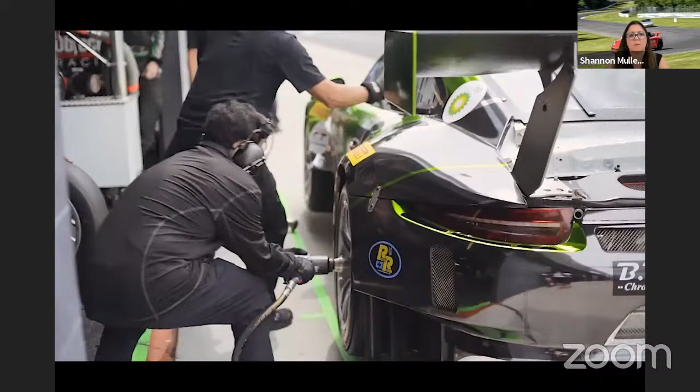In comes the leading car, the 12, to get service. And one pit box up, Black Swan has brought in Luca Stolz, and they're handing the reins over to Jeroen Bleekemolen. So I think it's a pretty good time to be a Porsche driver.

And it's all coming down to fuel. Matt Campbell has 2 extra laps of fuel than the 2 Porsches ahead of him - that might just be enough to allow him to drive a bit quicker. Safety car comes out now. All bets are off. We're chewing our fingernails, and we're 2 laps better off than the 4 cars in front of us, so I'd hate to think how nervous they are on fuel at the moment.

It's going to come down to the wire, it looks like. 10 or 11 laps to go around here. The countdown is on at the mountain. Campbell can win this race.

There's a safety car. That Mercedes comes in and gives it a heck of a lick. Wow. Race suspended - this is history being made here in the 12 hours. So they will pull the cars onto the grid. The issue here for the guys at the front is they haven't pitted to fill the cars up with fuel, and now they can't.

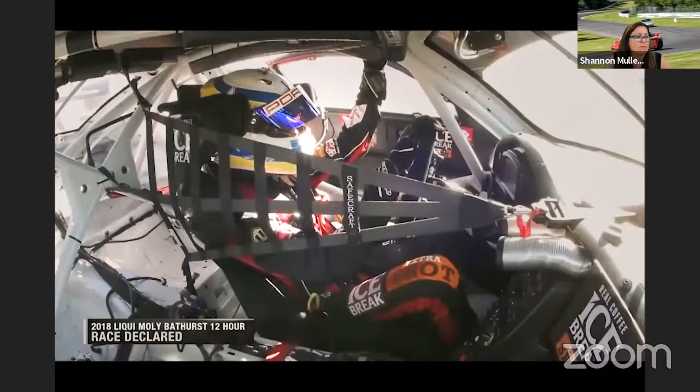Now the question on everybody's lips is how much fuel is still in those cars. Race control to all teams: the race has been declared. They've not seen the checkered flag. There'll be no more racing. And this is a unique set of circumstances here at the Liqui Moly Bathurst 12 hours.

You know, to come down here and run 12 hours of Bathurst without any issues at all is just a testament to Porsche Motorsport.

I think David and Tim's relationship is a small example of what I talked about - the connection to people all around the world. Porsche is almost a religion where church is at the racetrack, and you see all these people from different walks of life. But once you come inside the walls of a racetrack, you all speak the same language. You travel around the world together. There's this real connection where racing brings people together.

To finish second in class and 4th overall, I couldn't have done it without Competition Motorsport and the support of Porsche. Let's get him back out in BRM Watches Pro-Am for Black Swan Racing - Tim Pappas, Jeroen Bleekemolen, Luca Stolz and Marc Lieb.

You run a Porsche and you can win.

Well, that was pretty awesome. We'll ask you about the logistics of packing up and flying halfway around the world to go for a race in a little bit. But that was neat.

I'm going to jump to Bathurst 2019, and then we're going to show some pictures of that. But you were nice enough to show me and my friends around your operation - I got to meet some professional drivers in the bus. Mike, I think you were there as well. Yeah, that was an awesome time. And everything was running good. You guys were flying out there. And then it started to rain and rain and rain.

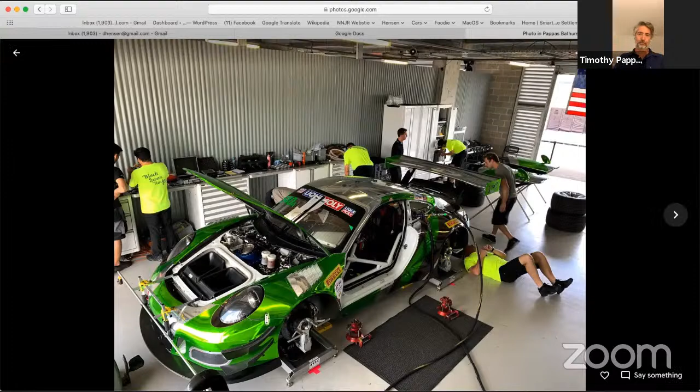And Conrod goes from 180 miles an hour, 6th gear, the fastest place we ever go, to a second gear left-hand corner. Straight ahead is basically a concrete retaining wall, because the earth goes up towards the hotel.

So that's me when I got off, basically pitched the car sideways to throw as much weight as I could, and also to hit backwards, which fortunately I did.

That's the aftermath. Those are the guys there, the spectators who put the fire out.

Oh, that's a small one. There's a big one. That's the car backed in and quite a bit shorter. And it was up.

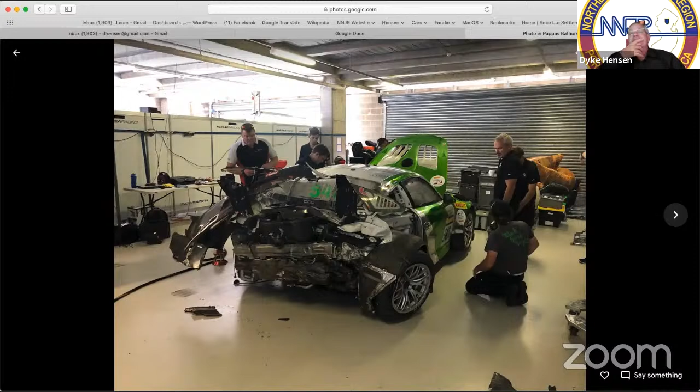That's the inside of my helmet. Can't really see from the picture, but the styrofoam inside basically got a huge depression and crack from where the back of my skull impacted it so hard. It was enough force that my head crushed the styrofoam inside and actually broke the carbon shell of the exterior of the helmet.

That's an 8860-2010, all carbon, $4,500 helmet that's basically like an F1 quality helmet. So it was an estimated impact of somewhere between 65 and 85 G's.

You can see the strap on my Simpson hybrid. I wear the hybrid instead of the HANS for a number of reasons, but you can see where the tether comes around the yoke and has actually cracked the carbon. Wow.

And that's my right arm, which has a fully separated and telescoped fracture, because as I pitched the car to spin it backwards, I was able to tuck my left arm in before impact, but my right arm was still out. The force was so strong my arm kind of flopped out sideways and just snapped around the seat.

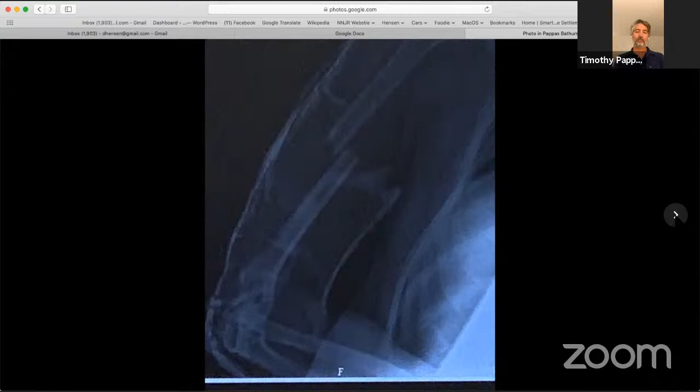And that's what they did afterwards to fix it. So now I have bionic parts.

At the same time, when the car smashed backwards, the car got a lot shorter, and my legs on both sides smashed through my pelvis. The left side was much worse than the right side because of the dead pedal. My leg was much closer.

And that one required pins and screws and stuff. The right side was fractured, but didn't require surgical enhancement. But it did put me in a wheelchair for 3 months.

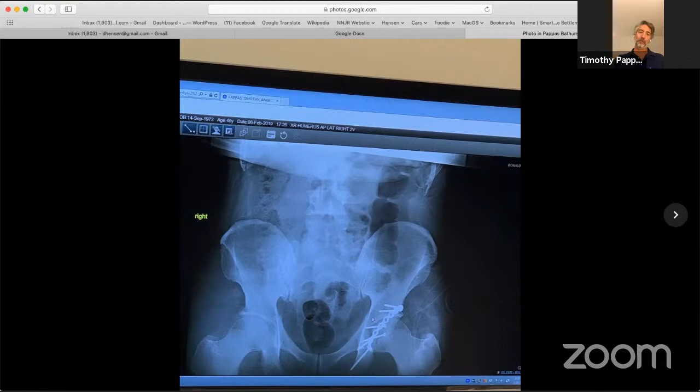And I had to wear that around the hospital. That was my badge of honor.

One thing I got to point out is you got this surgery done in the United States, not in Australia, right? Yeah, it's an interesting point.

Porsche and Audi bring doctors to all these flyaway races. That's another thing that's pretty cool about being a customer of Porsche or Audi. The Porsche doctor was German, and the Audi doctor was actually an ER doctor from Denver, named Alex. The head of Audi Motorsport, who's a friend, Chris Reinke, texted me saying, hey, we've got this American ER doctor, do you need him in the hospital?

And I said, yeah, it'd be helpful. I don't really know what's going on, and it's hard to make decisions. So he came to the hospital in Sydney from Bathurst, spoke to the hospital, then came to me and my wife and said, there's no way you're having surgery here.

He was communicating with Terry Trammell, the famous racing orthopedic surgeon in Indianapolis, and Trammell just didn't have a guy in Australia that he trusted. So the decision was made that I would fly back to Los Angeles and have surgery there.

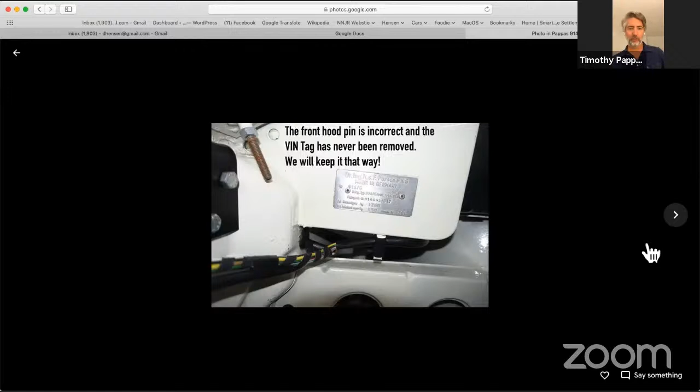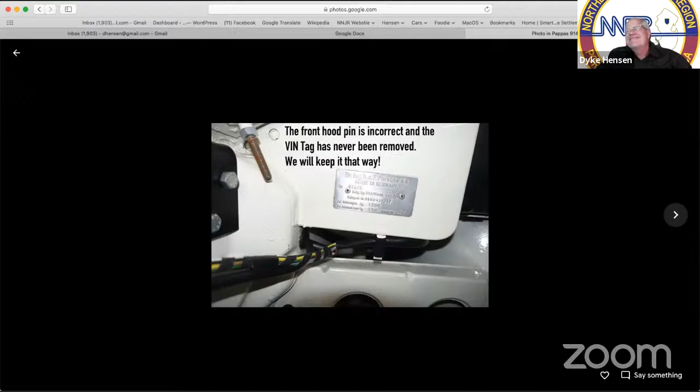There's a lot of writing on these that's hard for me to see on my phone. Okay, this says the front hood pin is incorrect. The VIN tag has never been removed, we'll keep it that way. I don't know that we need to read every one—you can leave it up and people can read it if they like.

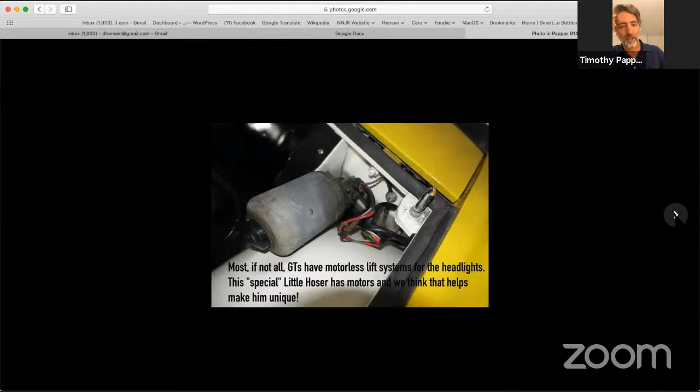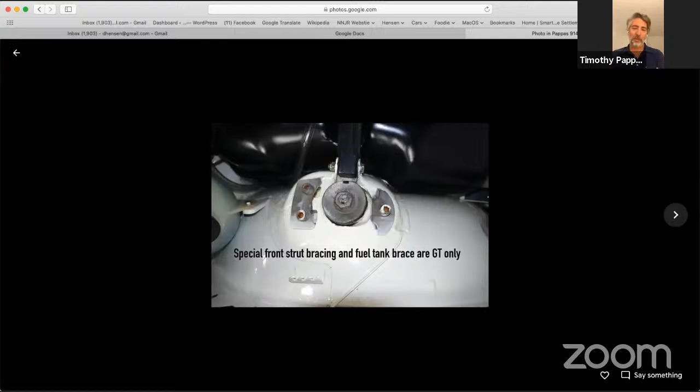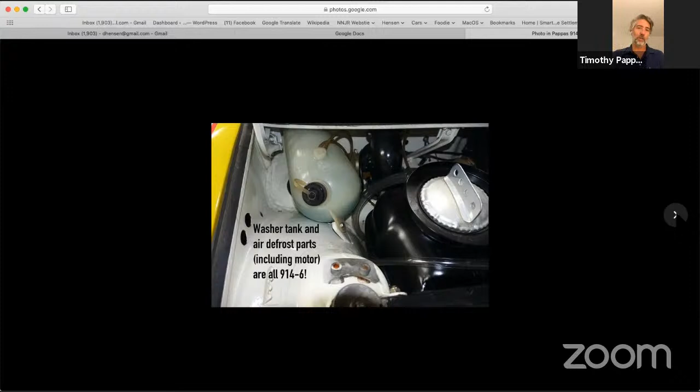I think the more important and fun thing is Kevin takes the car apart and makes all these notes, then posts everything on Instagram. He's posted this entire story from start to finish about the process of restoring what we're calling 1017, which is the last 4 digits of the VIN. This included taking the paint off selectively in different areas, very carefully, to find out what colors were underneath. Doing this, we ultimately uncovered that the car had been painted signal orange, and only the factory GT cars, the ones they intended to campaign themselves, were painted signal orange. The customer cars were all painted white.

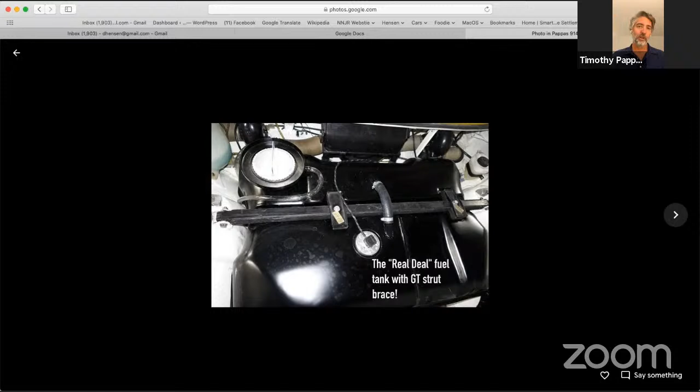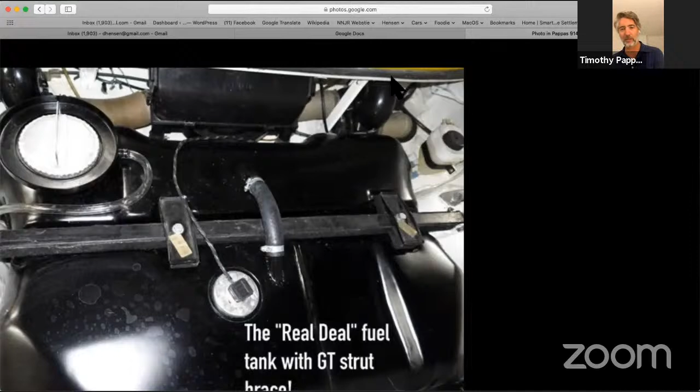Well, this one, underneath the white paint, had signal orange paint. So as we restored it from bare metal, we primed it, and then after priming it, we painted it first signal orange, then white, and then the livery it won Daytona in, so that it's completely accurate in every way.

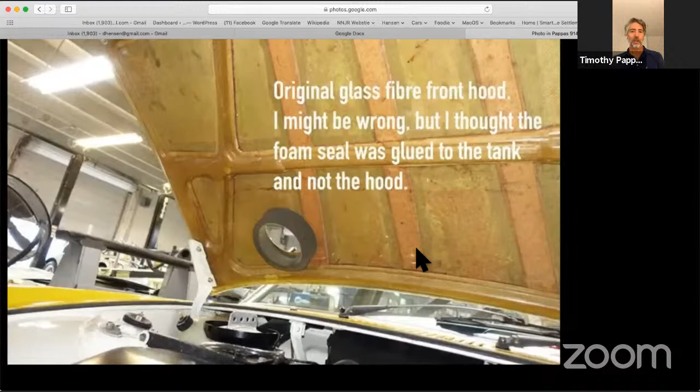But we did do some other fun stuff. The factory hoods and all that are still there. Kevin took... we took the fuel tank out, the factory GT fuel tank, and he splashed a mold off of it.

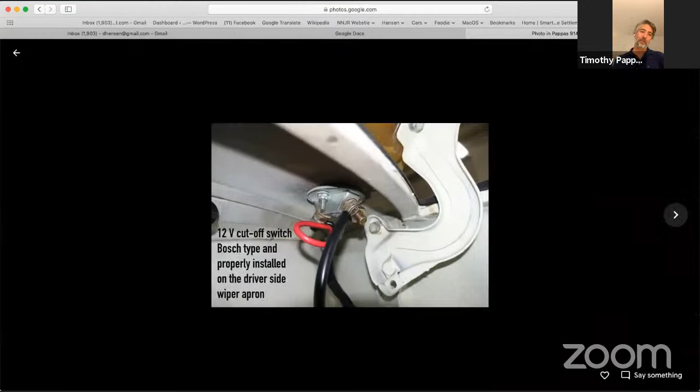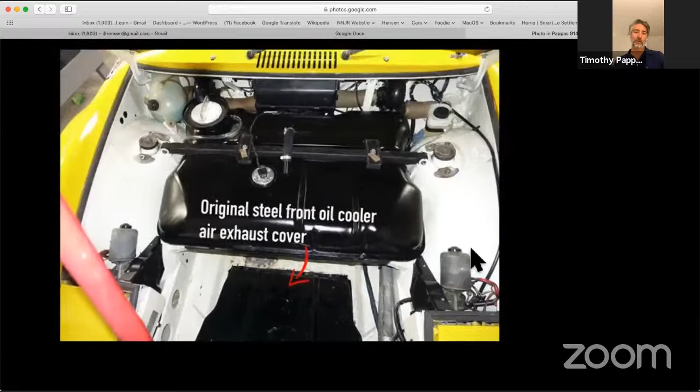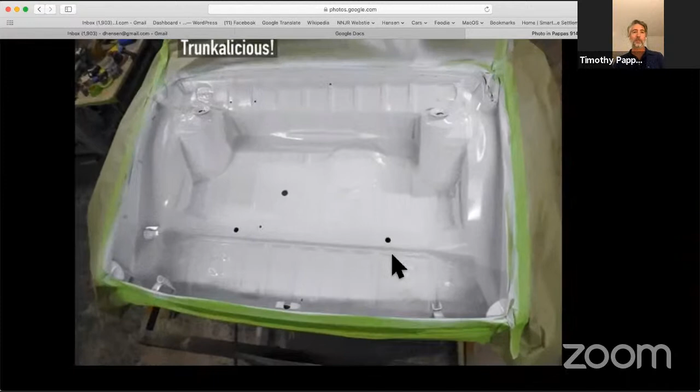We're making basically a fuel cell just the way the factory would have done in the later cars, because they didn't have a fuel cell—this car just had a steel, non-fuel-cell tank. So we've now converted it into a proper ATL fuel cell, using the tank and painting it in such a way that when you open up the hood, it'll look like a metal GT fuel cell, but it's actually a proper safe one.

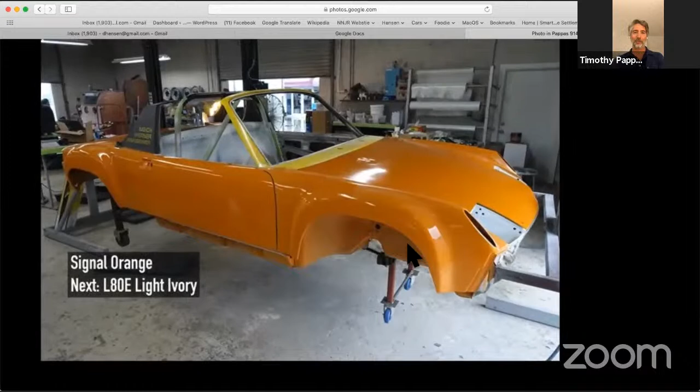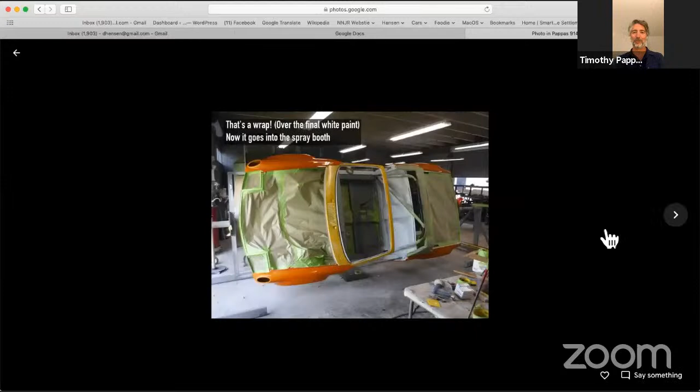So there it is in signal orange. And of course everyone says, I can't believe you're putting 20 pounds of paint on the car just to have it authentic. But I could not convince Kevin not to do that. He just refused to cut corners. For him, authenticity is everything, and he really marches to the beat of his own drum.

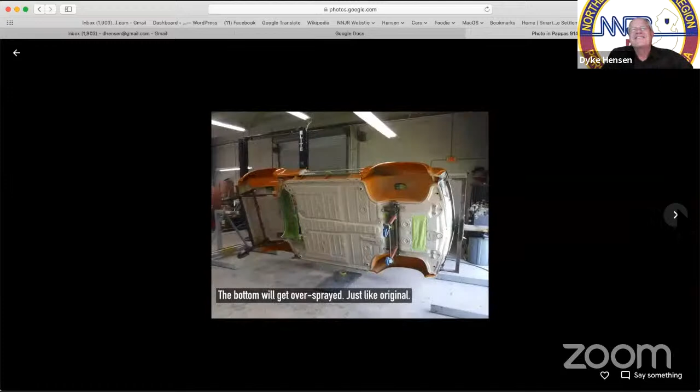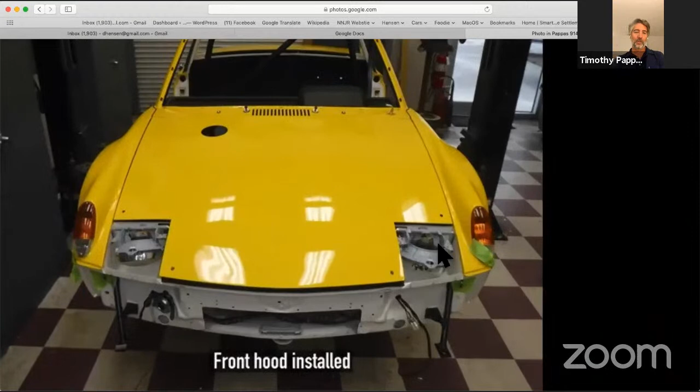Yeah, it's beautiful. You uncover and learn a lot about what went into these cars, and we had a lot of debates about what to do on the safety side. It will ultimately have a current modern Recaro racing seat with a halo around the driver's head, mounted at 6 points in the car. You can see a picture of it.

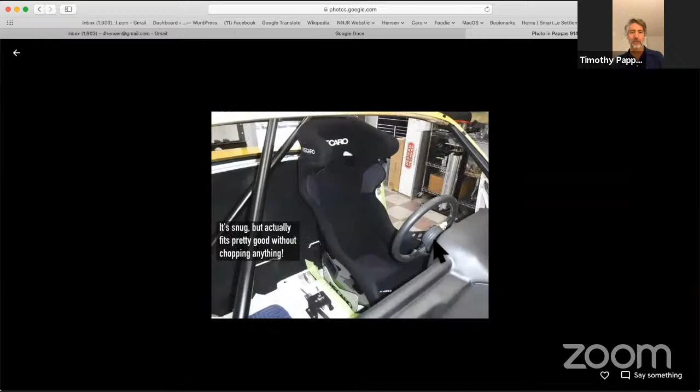One of the guys was quite tall, and so in the driver's seat, you're sitting on the cushion and then there's just nylon webbing. They actually cut the bottom of the shell of the seat out in order to sit the guy down as low as possible, which is just, you know, scary. But back then, that's what they did to make themselves comfortable.

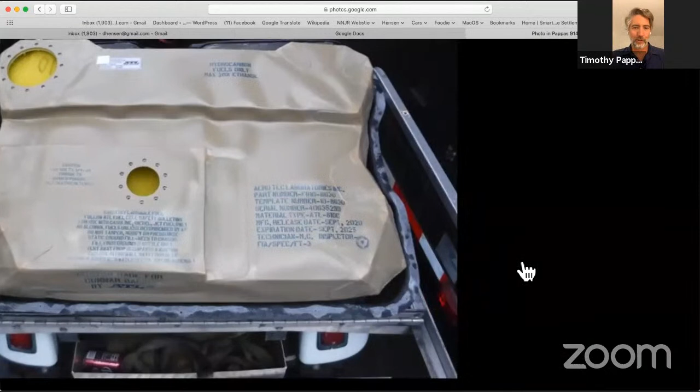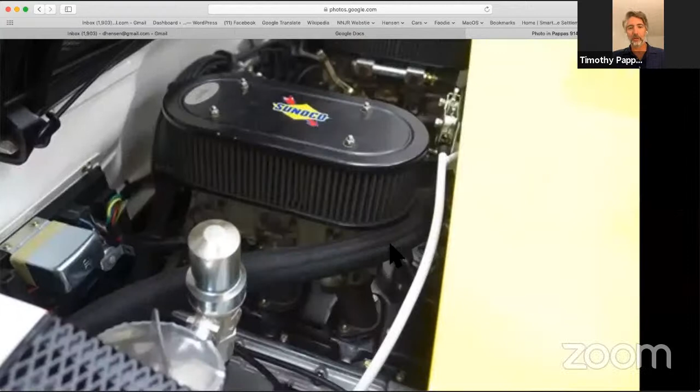So there's the new ATL fuel cell going into a knockoff outer shell. And there it is, just about completed before we put the engine into it, but with graphics going on. Actually, on Friday of this week, it's going to run for the first time.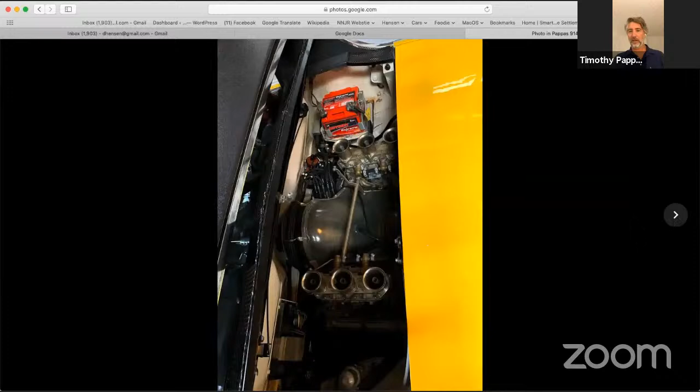We built the engine out in California, and it was fully HSR legal and FIA legal. So it should be interesting to see how badly we get beaten by everyone else who's cheating like crazy in the series, because again, Kevin didn't want to build a cheater motor for it.

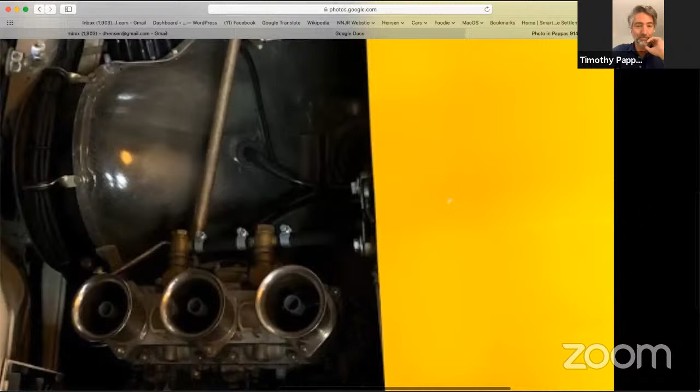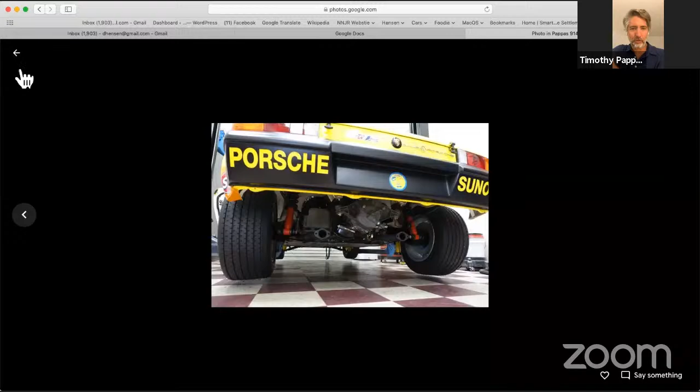Yeah, it's beautiful. It is absolutely beautiful. Very rewarding to learn about how these cars were built.

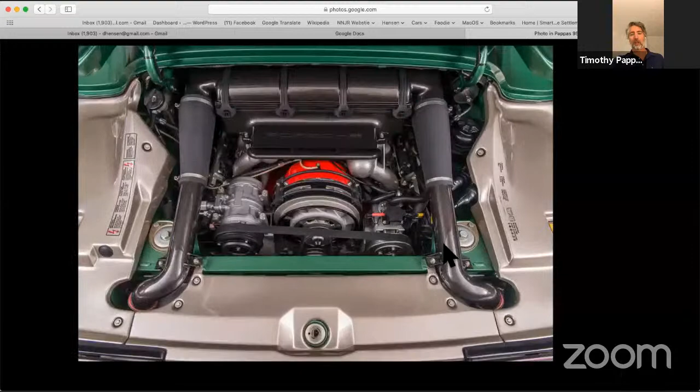He took me for a ride in the car, and it was only about 6 minutes into the ride where I said, okay, sign me up.

He goes through and completely changes everything in the car. The engine in the 959 is by far the most incredible engine Porsche has ever put in a street car of this era, because it's a 4-cam, 4-valve, twin plug, twin turbo. But it had a lot of funky stuff, like sequential turbocharging. So what Bruce did was take all the best attributes and convert it into standard parallel twin turbocharging, convert it to Motec engine management, and do a whole bunch of other stuff. But because you're starting with a water-cooled cylinder head with 4 valves and twin cams, you can make gobs of power. So that car, 2.85 liters, makes 820 horsepower and 650 pound-feet of torque.

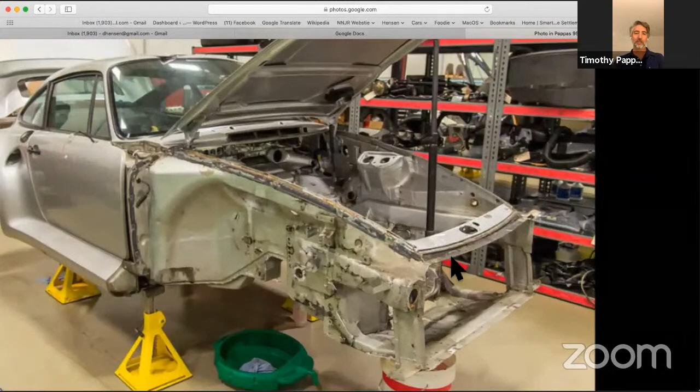When he told me that statistic, I basically called BS and said there's no way. So he took me for a ride. And Bruce, if anyone would ever ride with him, just don't, because he's a maniac to drive with. He did his best to scare the hell out of me, driving his own car. After about 10 minutes of driving, we pulled up to the first traffic light after this hot lap, and the brakes were smoking so badly out the side of the car. I couldn't even believe it, because he had pushed it so hard.

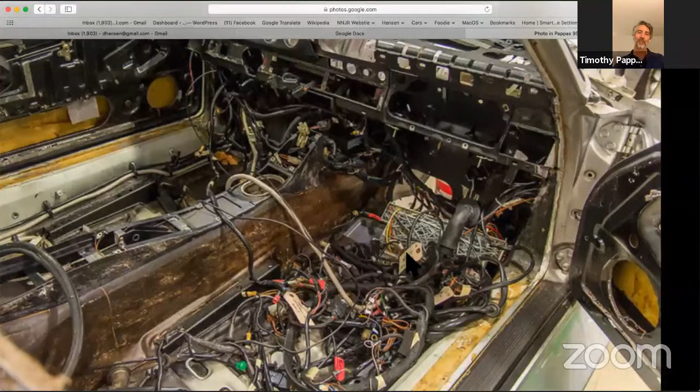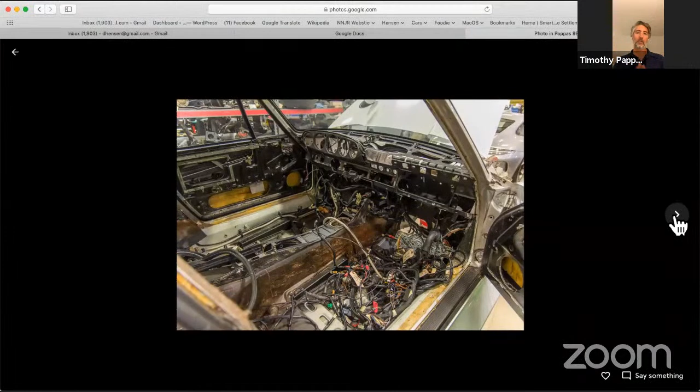You can see the amount of electronics in one of these 959s is unbelievable. It had self-leveling ride height using hydraulic lifters. What we've done is basically converted the car to the equivalent of 959S suspension, so no hydraulic lifters, but still twin shocks at all four corners, and the shocks have titanium springs to save weight.

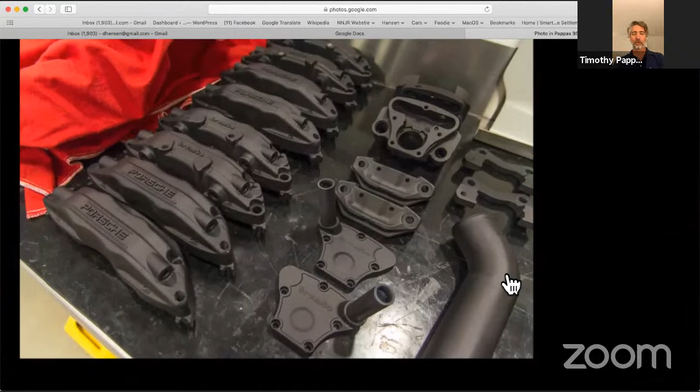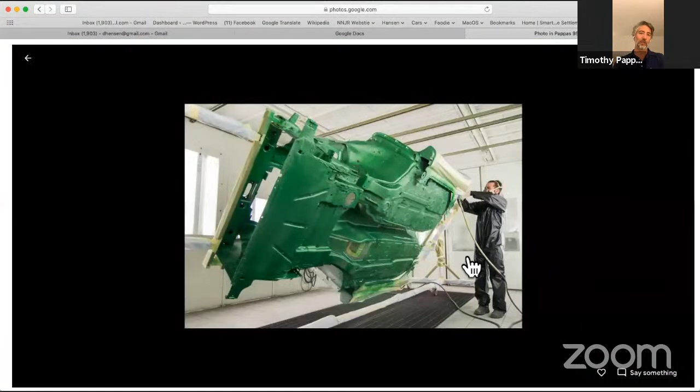Everything has gone through a rebuild, and the air conditioning is updated to a fantastic system. So it has all the creature comforts and luxury, an amazing sound system, amazing ice cold air conditioning, leather, sound deadening, everything you could possibly want. And there's nothing faster than this car, it is a rocket ship. I think Mike went in it, maybe Mike drove it, I can't remember. But it's pretty sensational. I have yet to encounter another Porsche that's as fast, and I've driven just about all of them.

So I've got a question on this picture. This red stuff that looks like lava flowed off the fan housing, what is happening there? You can't actually see from your photo what you're talking about. It's the fan shroud. Yeah, it looks like they poured it in and then said, okay, that is good. That's fine, it's only for cooling.

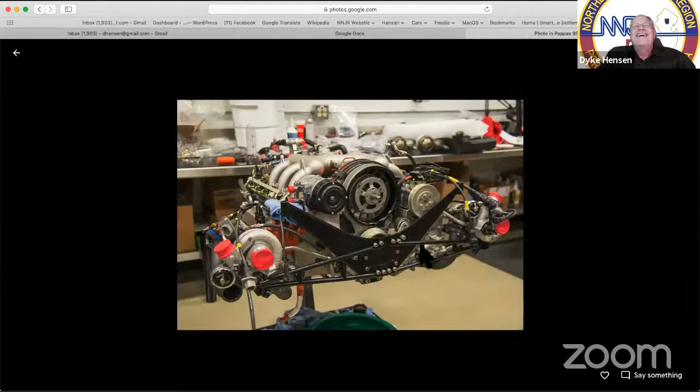He's gone through at this point, my car. So here's a great part of this story for anybody who knows aftermarket stuff. I wait 9 months to take delivery of the car. I get the car, and after I get it, it gets debuted at Luftgekühlt at Patrick Long's event in Los Angeles.

Everybody goes bananas because the car was originally silver. I said, green is my color for the team. We picked emerald green metallic, the factory color Porsche used in '74 or '75 to launch the 930. That was the launch color, and I said that's the best color. So they said, we'll paint the car. Of course Bruce wants to put a brown interior, and I said no, it's got to be green on green. We even mixed some green paint into the black on the wheels.

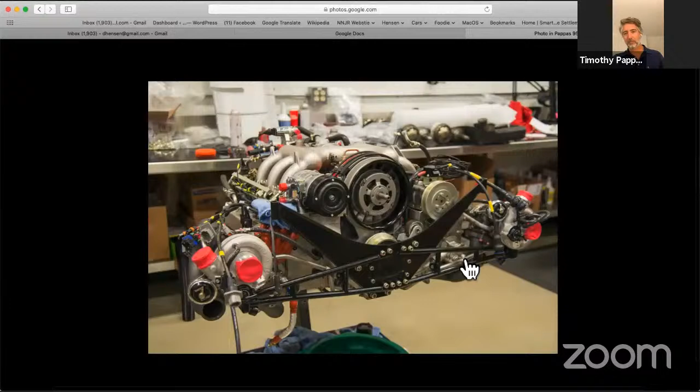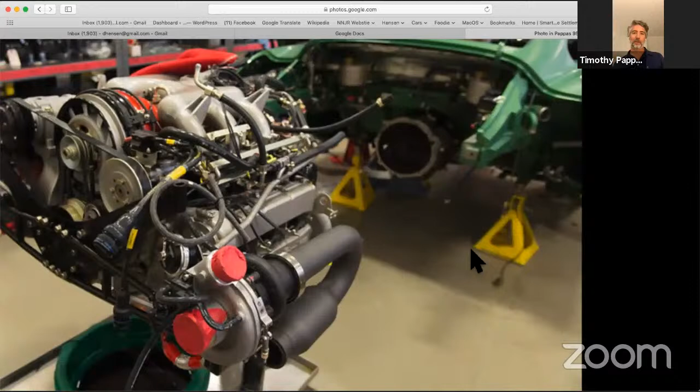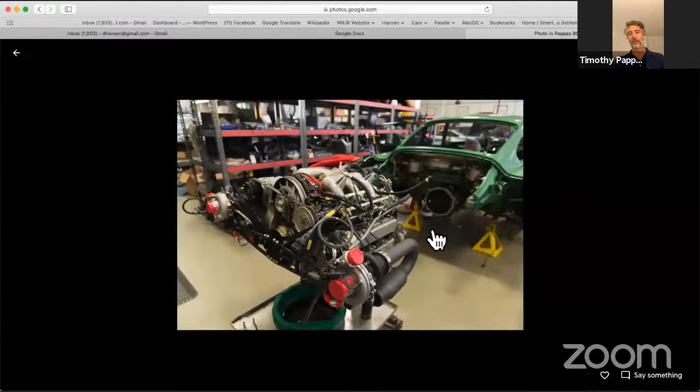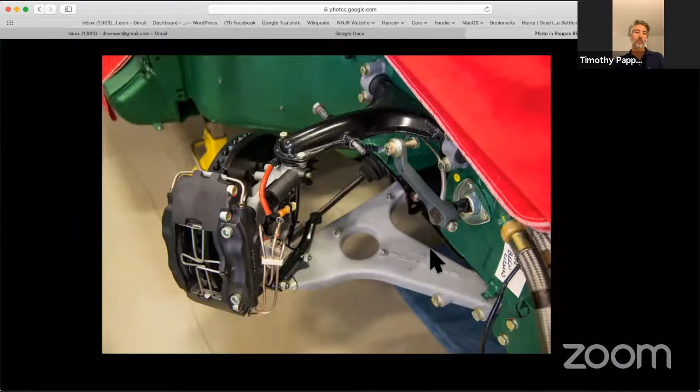We debut it at Luftgekühlt. He goes out and sells 11 more copies on the heels of my car debuting there. After he does a couple more, he actually makes more modifications to the engine—custom rods and cams, different turbos, titanium exhaust, different headers, blah blah blah. So he calls me and says, look, I want your car back. I need to make it exactly the same. Your car's sold so many additional cars that I'm just going to do your car and take care of it. I said, okay, great.

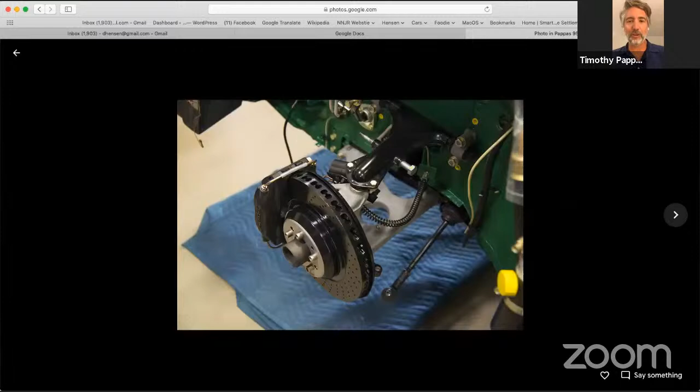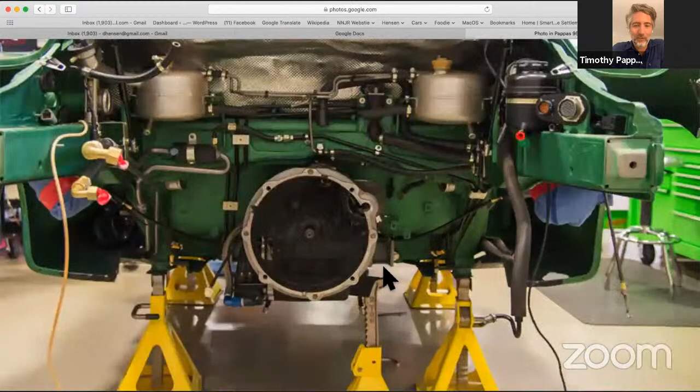Well, how long is that going to take? He said it'll take me 3 months. Well, it just clicked over 2 years that the car's been there. Every time I text him, like, hey, how's that motor coming? He's always like, oh yeah, we're just waiting for parts. So I don't know, somehow it'll get done someday.

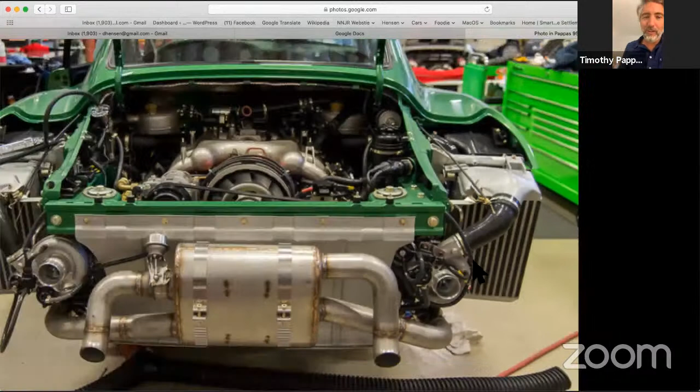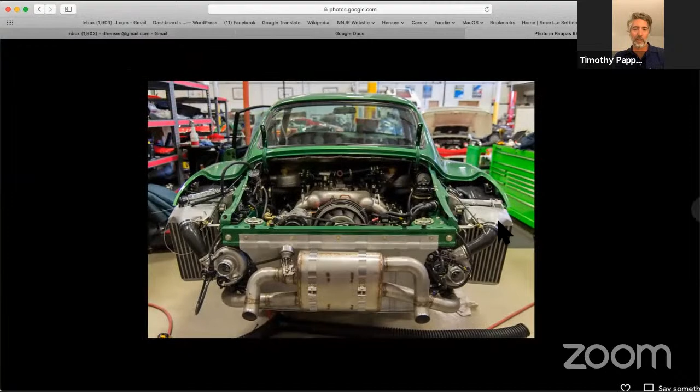But that muffler you're looking at right now—what's on it now is the most insane looking thing. That's the Generation 1 muffler, and the Generation 2 is like X-crossed over and all titanium. They've just gone to insane lengths. The new iteration of the motor on E85 made almost 1,000 horsepower, and that's still 2.85 liters. It's running, I think, 35 pounds of boost.

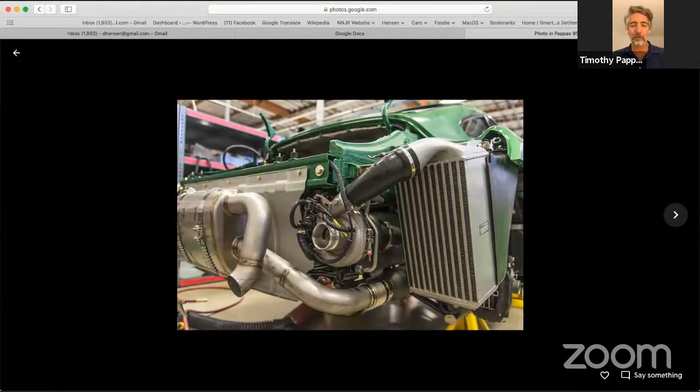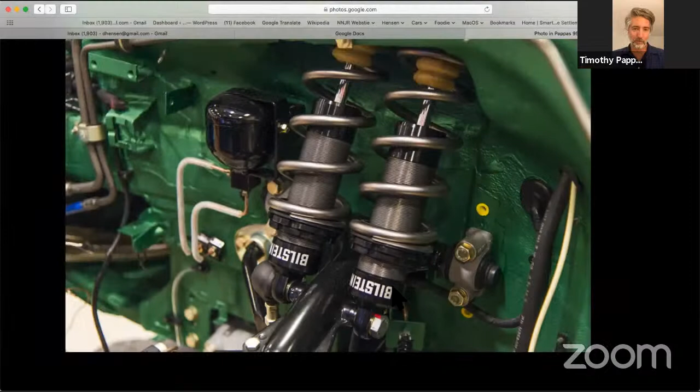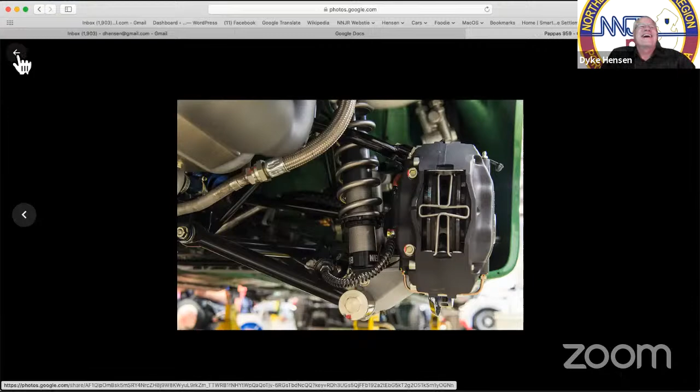There's your dual Bilsteins. Titanium springs—oh yeah, because steel, that much steel would definitely be too much weight. That is absolutely nuts. Okay, I'm gonna go back to that. Yeah, that made my evening. That was my dream car.

But can we jump to the 904, which is pretty neat? We can jump to the 904. The 904 has a great story.

This one was owned by—and everybody always wants the barn find, well this one was not in a barn—it was in a shipping container on this guy's property in Southern California. A really neat guy who was actually president of his local chapter of PCA. His name was Les Gunnerson, from Orange County. This exact car he bought in 1968 when it was 4 years old. It had been lightly hill climbed in Italy and then made its way to California, and he bought it from the guy who brought it here.

The guy who brought it here did a little racing in California before Les bought it, and he restored the car, even though it was only 3.5 to 4 years old. He restored it, painted it red, and put in this funky interior that sort of looks like an early 911 with the wooden dashboard. But he passed away last year, and meanwhile the car was in that green shipping container for about the last 22 years—hadn't been driven.

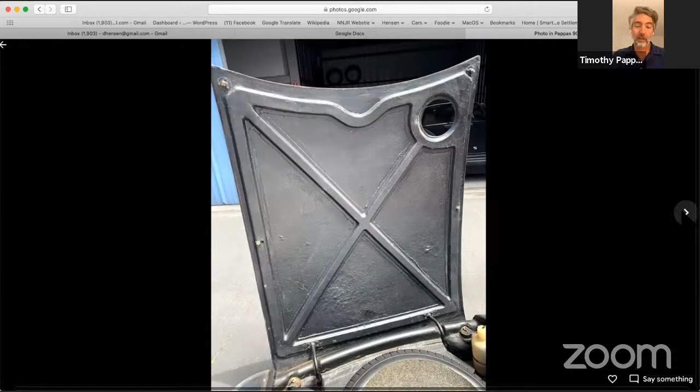He also had a really great '56 Speedster, a 1967 911R, and a 550 Spider, also in red. Just a really interesting guy—he was an engineer, worked for one of the defense companies in Southern California, and he bought Porsches and loved Porsches.

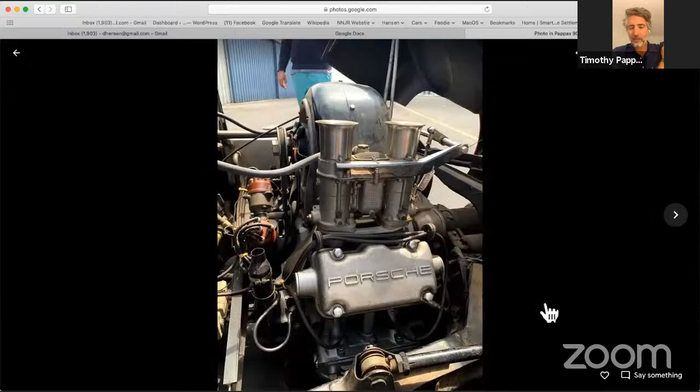There's a fantastic picture—I couldn't find it, or else I would have sent it to you—of this car at the premiere of Le Mans in 1970 in Los Angeles, because he knew Steve McQueen, and Steve assembled some really neat Porsches on Sunset Boulevard for the premiere. This exact car was at that premiere.

So I found out about the car and ended up purchasing it. I did a pre-purchase inspection with Rod Emory, a good pal of mine. This car sat in Gary Emory's showroom at Parts Obsolete for about 5 or 6 years at one point, and when Rod was 10 years old, he used to sit in this car and pretend to drive. Now the car is being restored by Rod Emory, which is really neat for me because he's the best, and we've become very good friends over the past few years. We're very similar in age, and he's just so passionate because he's known this car his whole life.

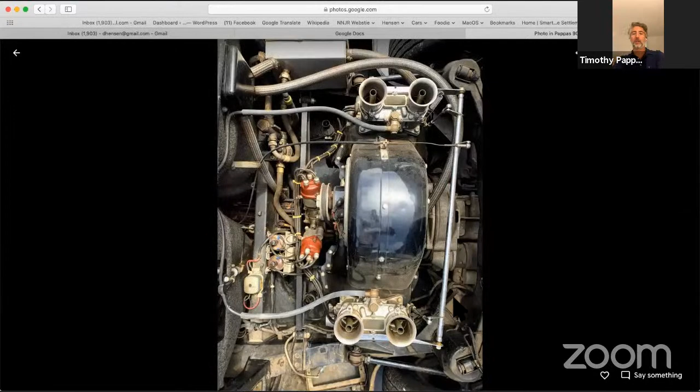One of the things I particularly liked about this was that so many people who had 904s ditched the 4-cam 4-cylinder and put a 6 in it. The 904 was meant to have a 6-cylinder, but Porsche couldn't get the 6 ready in time. So they made one last iteration of the 4-cam 4, the Type 587-3, 2-liter, approaching 200 horsepower, twin-plug 4-cam. This one has numbers matching engine and gearbox, and is so original and complete from a guy who really loved it and cared for it.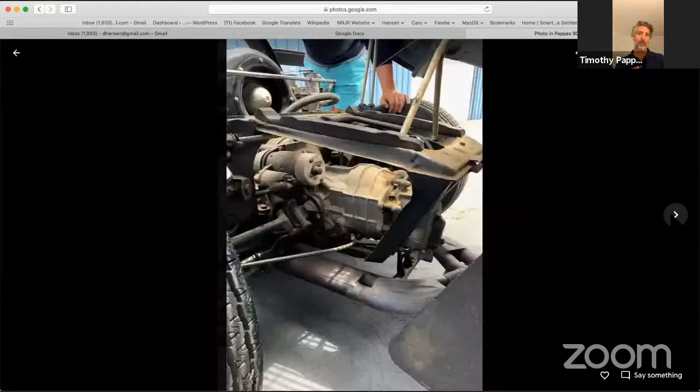We now have the engine out, and it's being fully restored by Ed Pink Racing Engines in Van Nuys, California. The chassis is being done by Rod Emery, and our goal with the chassis restoration is no paint. We're going to clean everything, fix things, but try as best we can to maintain all of the original paint.

And we're going to take out the funky interior—I don't love it, and it also reduces the headroom a little bit. But to find one where the tank isn't rusty, with the gas heater still in it, it's just a very cool original car. We want to preserve it, as opposed to the process we went through with the 914, where I said, look, it's already been restored once and not well, so let's just take it to bare metal and start over. This car was painted red in a restoration in '68, and has otherwise always been the red 904 in Costa Mesa, and that's how we're going to restore it.

I think it's awesome. I love the 4-cylinder.

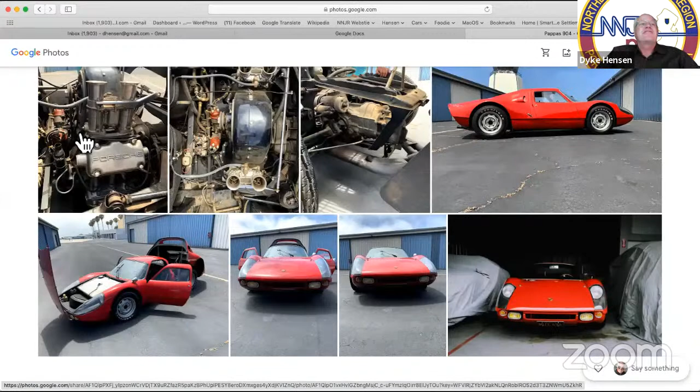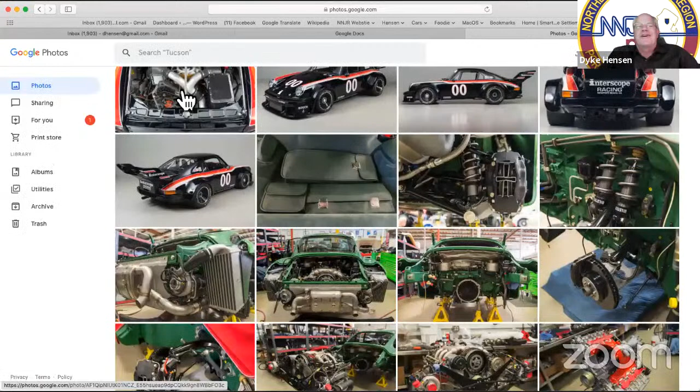I was looking at the size of the velocity stacks, and I guess this is a question for Mike—I used to know that short stacks mean high RPM, and long stacks mean more torque. Is that right? Yeah, that's pretty much true. Those are original Weber 46s on there; that was the hot setup in the day.

It's actually been modified, as was commonly done in those days. The motor is completely stock except it has a custom exhaust that looks like a Sebring-style exhaust, but it was done so crudely—it's actually flat plate rolled into tubing to make a Sebring-style exhaust with 1 7/8 inch diameter primary tubes, which are massive. The carburetors on it are actually 48 Webers, which was a pretty common upgrade for those cars. Because when you think about it, yes it's a 4-cylinder, but it makes 2 liters with only 4 cylinders, so the cylinders are decent size compared to, say, a 2-liter 6-cylinder that ran on 46 carbs. So a lot of people changed them to 48s or even 50s.

That's a cool car. Where do you want to go next? Let's see, we're at 8:37. We could probably—boy, we got lots of pictures, but I know there's probably a lot of questions coming in. So we have the 934, which is that short one, and then we got the pink RSR which we just got to go through—it's magenta, Dyke. Oh, whatever it is. All right, I'm going to hit the 934.

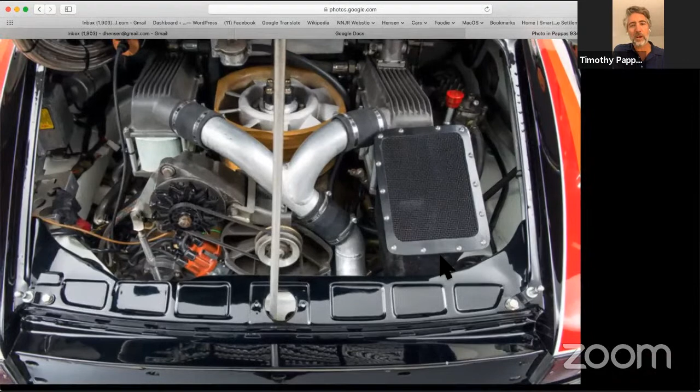4.5 seconds of turbo lag, and then boom. I have to say it's incredibly fun to drive because the challenge is in the braking. If you drove it like a normal track car, braking, trail braking, turning, and slowly feeding in the throttle, you'd go from whatever position you're in to three places back. So you have to left foot brake it. As you trail brake and turn in with your left foot, your right foot is flat on the gas, and you time it so you hit full boost at the apex and hope you get it right.

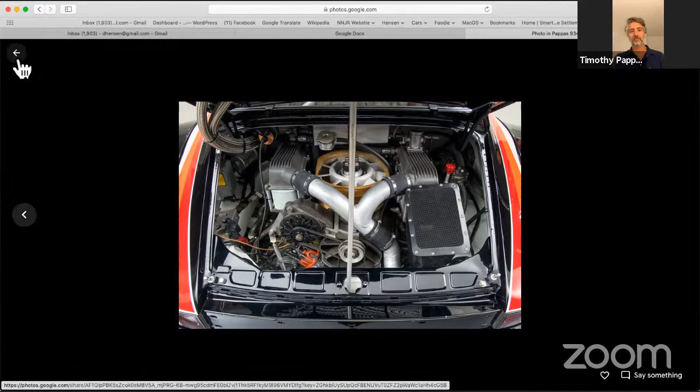I like that. I know it's not pink. What color is it, Mike? Magenta. Magenta, okay.

This one is magenta, the 74 IROC color, one of the original IROC colors. The story with this car is Kevin Jeannette built it, and the idea was to build a hot rod that was everything you could have had built by Porsche if you ordered an RSR for the street. So there's no modern stuff, no modern tricks, it's an original factory color. It has a 3-liter mechanically fuel injected slide valve RSR motor, RSR 915 trans, period correct Recaro seats and Autoflug seat belts.

Everyone at this point was doing hot rods going the Singer direction with modern fuel injection, engine management, ABS brakes, air conditioning, and other creature comforts. We decided to go more old school and build the car with big flares and a lot of mechanical grip. The engine, with megaphones on it, sounds pretty amazing. Revs to 7,500 and sounds like it's revving at 10,000.

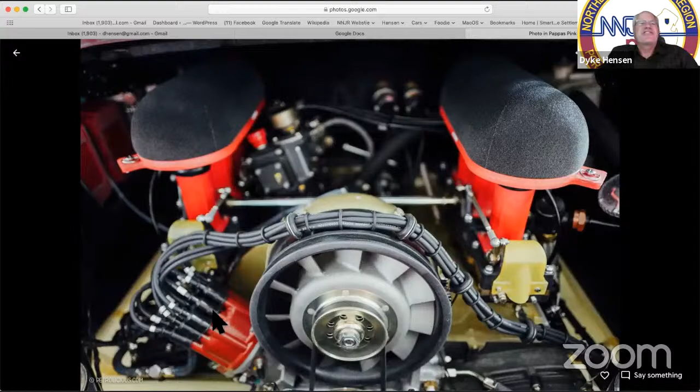This one is outrageous. And there it is. Yeah, look, you got too many plugs for a 6-cylinder. That's that old 12 plug distributor cap. That's wild. Yeah, that's very, very cool. I didn't know it was a slide valve. I think that's neat.

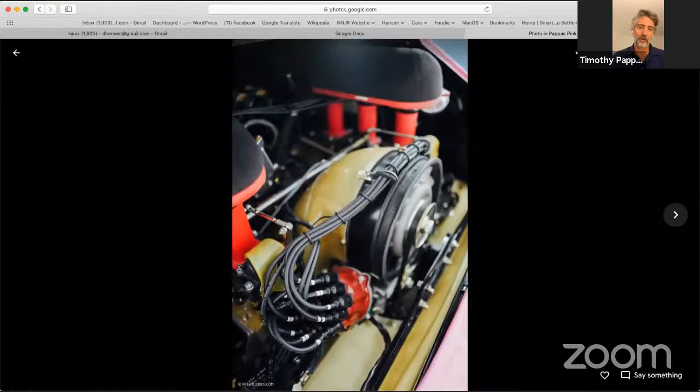A lot of people said you really don't want slide valve for the street, you want high butterfly. After driving it for a number of years, I can say it really would be ideal if you were going to build one of these for the street to make it high butterfly. The slide valve just works WFO, wide full open. It doesn't work part throttle very well, not nearly as well as high butterfly, but it looks super cool. So that's all right, I agree.

That is one bad looking ride. My other car is a 991 GT3R. Yeah, all right, that's a Kevin Jeannette license plate frame.

All right, that was fantastic. You are a trip. Did I cover all the cars? You probably got others that I don't know about.

I think we're about right on time. Hello, Shannon, did we get any questions? Waiting for us, Dyke, to debate. We're supposed to debate now. Oh no, I'm going to replay this. I've had an excellent evening. I can't go there.